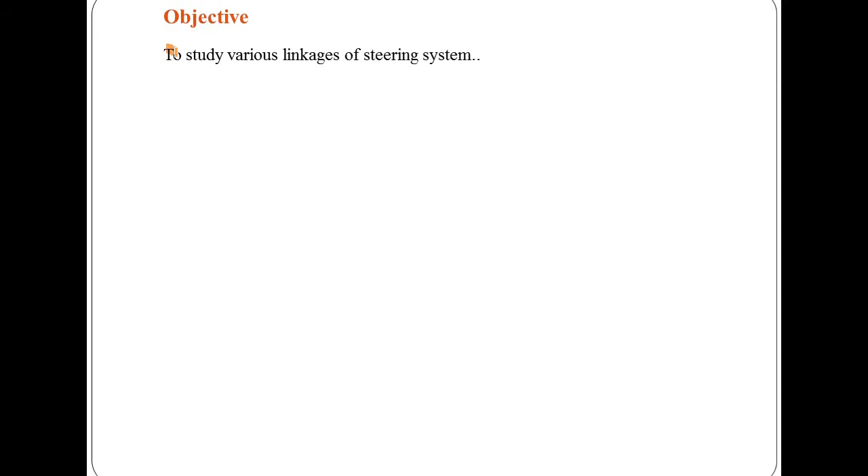In previous lectures, we started with the basics of the steering system, and we have covered some of the gear mechanisms of the steering system. So in today's lecture, we will continue with the further part. So let's start today's lecture. The content for today's lecture will be the objectives and the linkage systems. The objective of today's lecture is to study various linkages of the steering mechanism. So we'll discuss the linkage system of the steering mechanism.

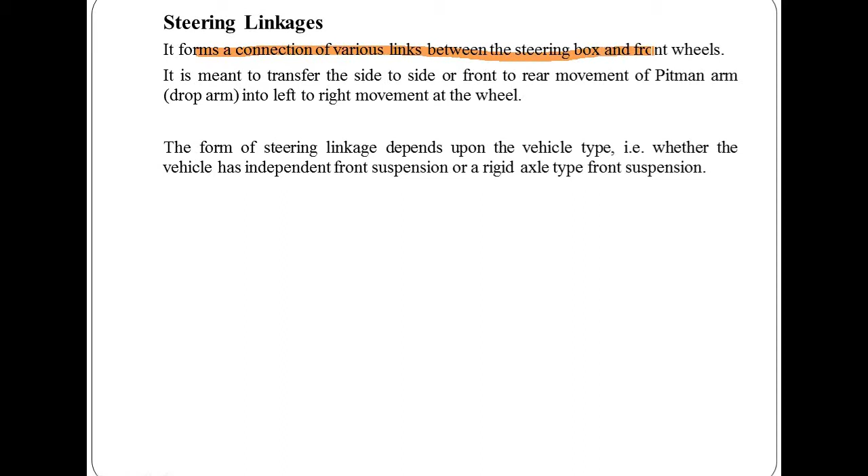Generally, the steering linkage is a connection between the steering gearbox and the front wheels, as we have already discussed the steering wheel and other units of steering systems. So the linkage can be considered a connection between the steering gearbox and the front wheel. In other words, it forms a connection of various links between the steering box and front wheels. It is meant to transfer the side to side or front to rear movement of the pitman arm, also called the drop arm, into left to right movement at the wheel.

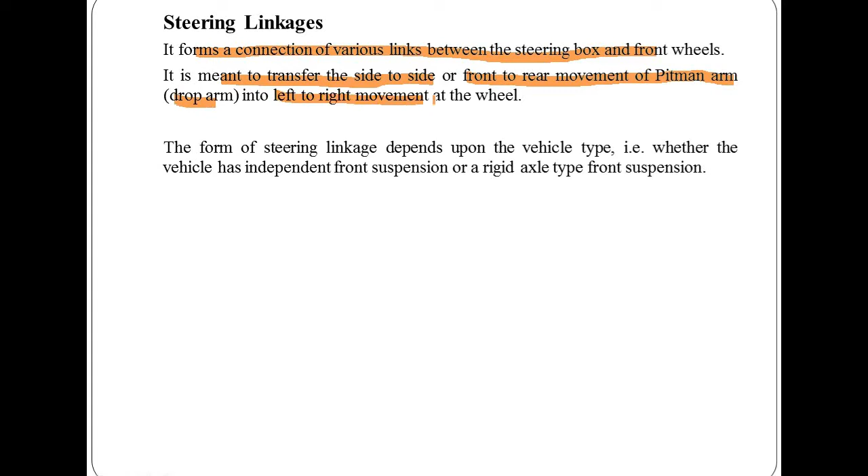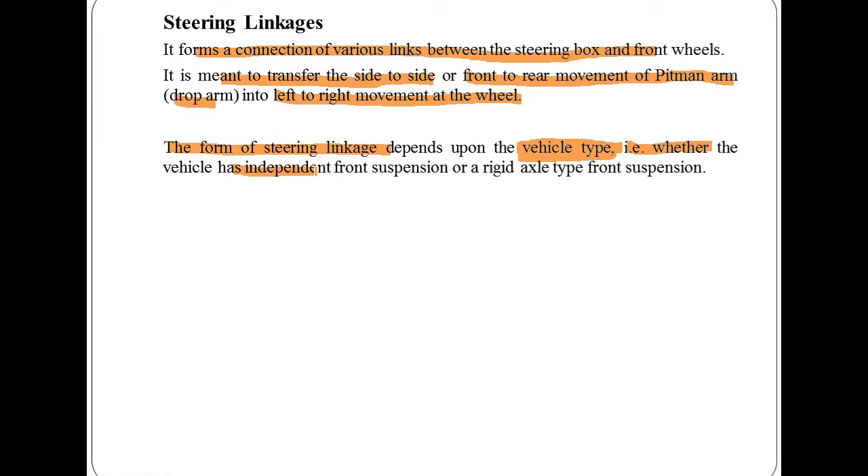The form of steering linkage depends on the vehicle type. So we can't consider that a similar kind of steering linkage is available in all types of vehicles. It depends upon the type of the vehicle, and according to the type, the steering linkage can also be different. That is, whether the vehicle has independent front suspension or a rigid axle type front suspension.

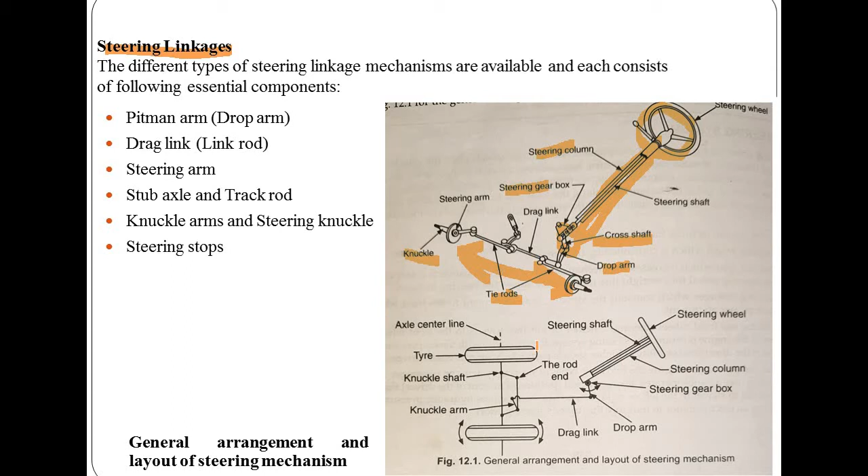Different types of steering linkage mechanisms are available, and each consists of the following essential components. First is the pitman arm, also considered the drop arm. Here I will change the color first. Okay, so this is the drop arm, or we can say the pitman arm. This drop arm is in connection with the further part, the drag link, and this gearbox is connected with the steering column and steering shaft. So the pitman arm is also called the drop arm, as mentioned here.

It transmits the output torque from the steering gear into a force at the drag link. This is the drag link. The larger end of the drop arm is taper splined to the sector shaft of the steering gear, and it is fixed by a nut, whereas a ball joint is used to connect its smaller end to the drag link. So this is connected with the drag link with the help of the ball joint.

Next is the drag link. It is a further connection, connected with the pitman arm or drop arm. You just observe, this is the drag link, shown here in this manner. So the drag link, or link rod, makes the connection between the drop arm and the steering arm. This is the steering arm, so this connects the drop arm with the steering arm.

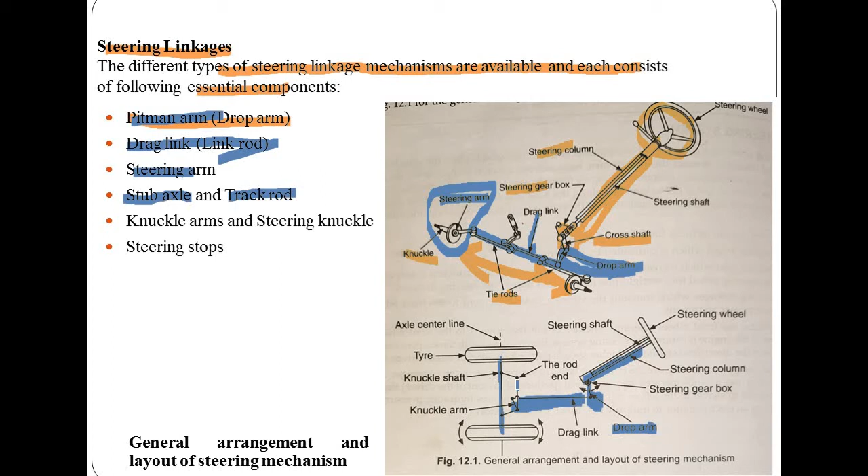The forged track rod arm of the stub axle is bolted to the wheel axis, and at each end of the track rod are the ball joints. So with the help of the ball joint, these are connected at the ends. These joints are so designed that any wear or misadjustment is compensated by an expanding spring.

The track rod is also provided with an adjuster for changing its length if needed while adjusting the wheel alignment, that is for keeping the front axle toe-in within the specified limits.

Then we'll discuss the knuckle arm and steering knuckle. So consider this portion. I will change the color of the highlighter here to yellow. So this is the knuckle arm. Generally the knuckle arm transmits the movement of the drag link, this one, to the front wheel via steering knuckles. So all these movements are transmitted via the knuckle arm.

The steering knuckles pivot around the ball joints or kingpin of the suspension arms to steer the front wheels. The steering knuckles attend to the following tasks. Some of the tasks of the steering knuckle are to support the load applied to the front wheels, and to function as a rotational axis of the wheels. So that is all about knuckle arms and steering knuckle.

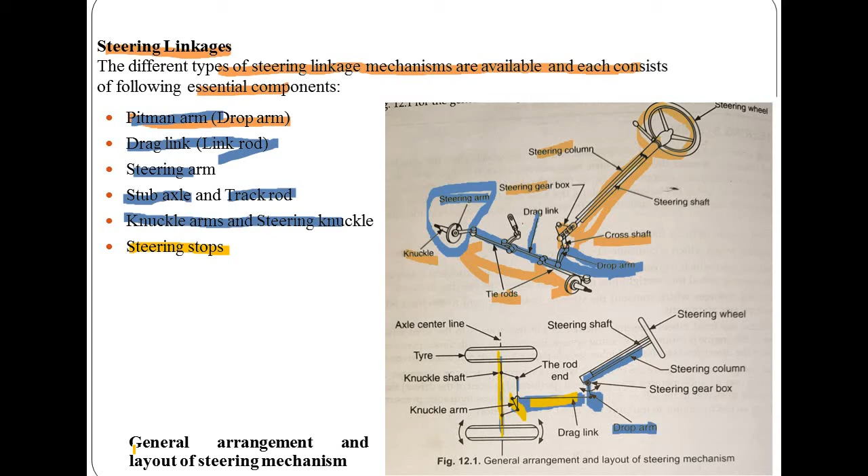So all this discussed the general arrangement and layout of the steering system, steering mechanism, through which we understood what various essential components there are for the steering linkages. So let's discuss the types of steering linkages. There are two types. First is steering linkages for rigid axle front suspension. We have already discussed that there are rigid axles as well as independent suspension systems.

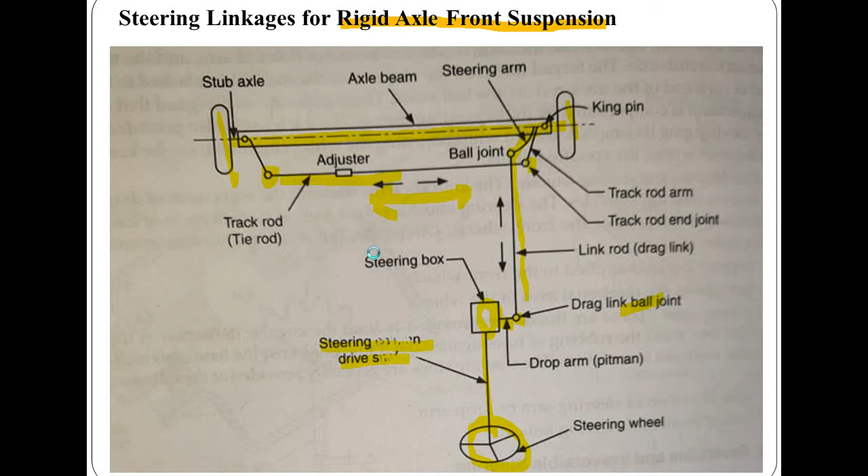So, its next type is steering linkage for independent suspension system. That is also very important because it has independent suspension. In case of conventional rigid suspension, the main axle beam ensures the movement of stub axle in the horizontal plane only, and therefore there is no vertical deflection of the suspension, and hence there is no change in effective track rod length. However, in the case of independent suspension, the two stub axles can move up and down independent of each other, due to which the distance between ball joint ends of the two track rod arms is continuously varying.

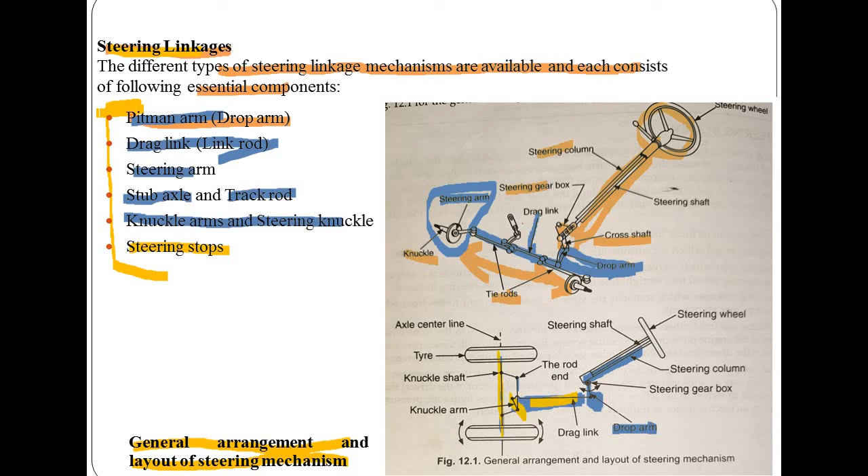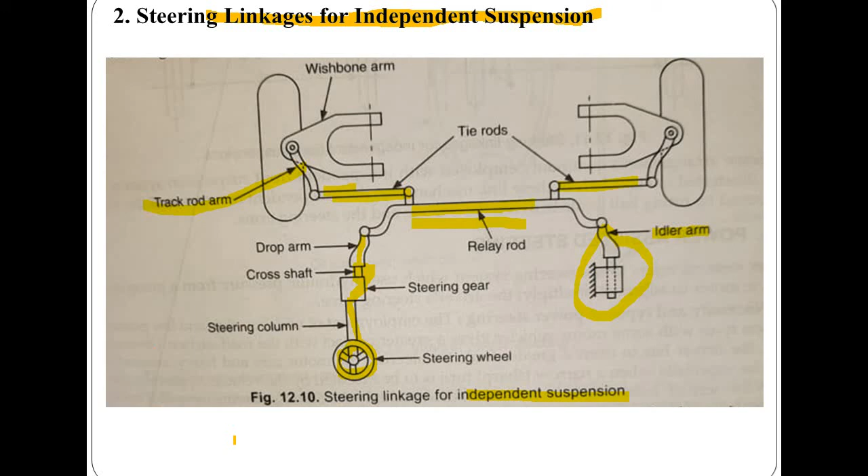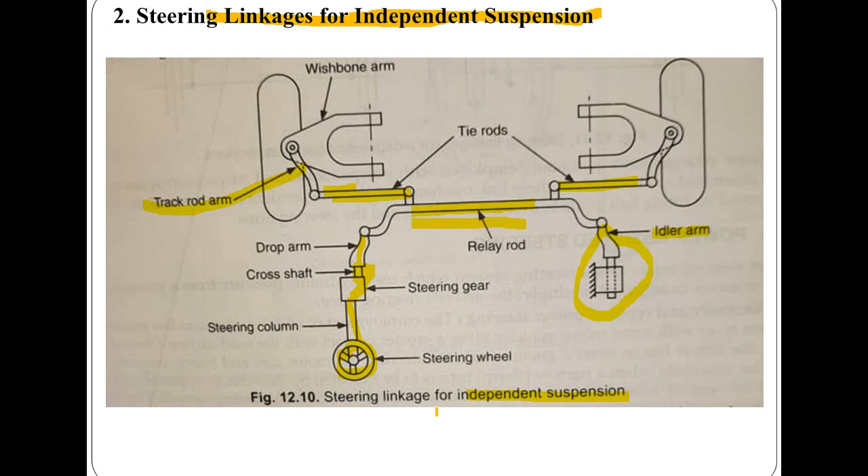So in today's lecture, we have discussed steering linkages, the essential components of steering linkages, and the types like steering linkages for rigid axle front suspension as well as steering linkages for independent suspension. I hope you understand the concept of linkages used in the steering system. In coming video lectures we will discuss power steering, and we will cover some contents of the stub axle.